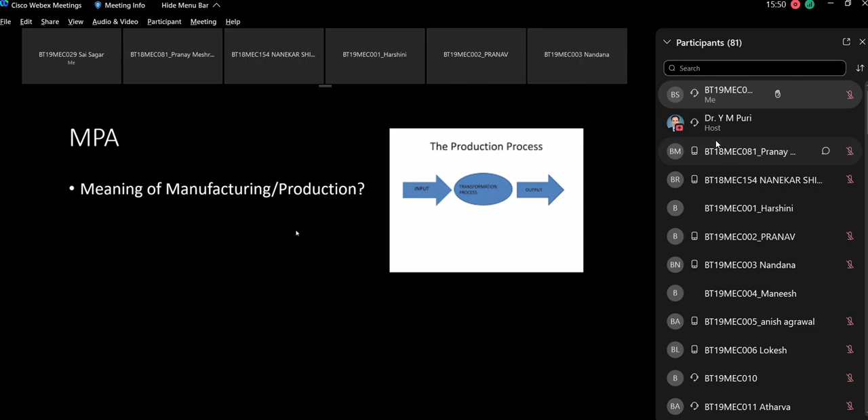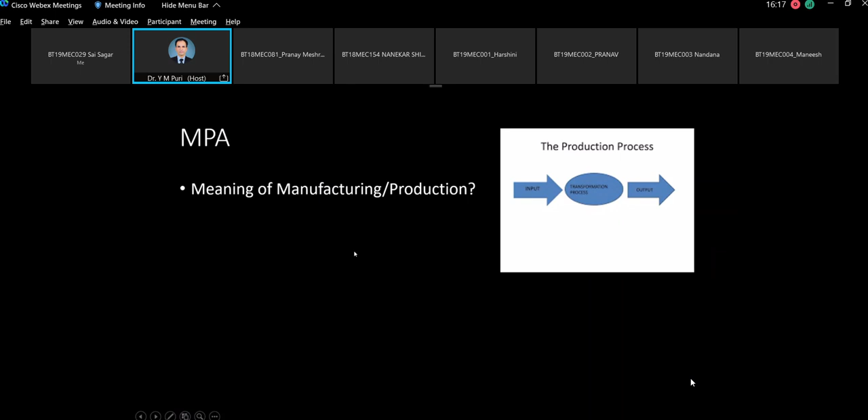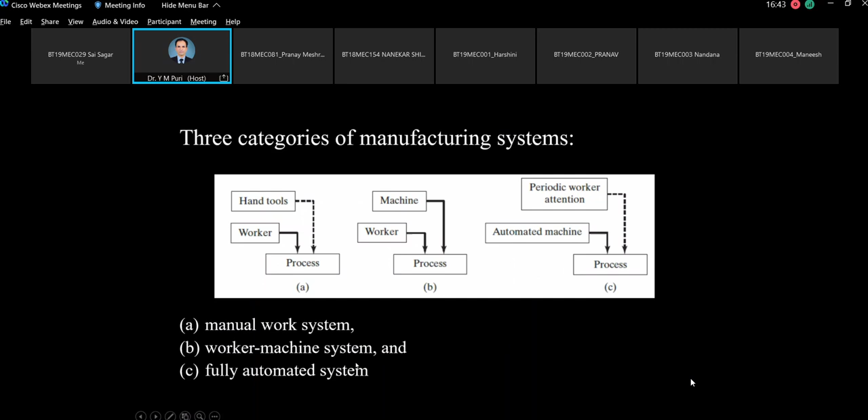So yesterday we have seen discussion regarding what actually manufacturing and production is, and then what are the different supporting activities and facilities of the production system. Then what are the three categories of manufacturing systems, like purely manual work system, then worker-machine system, semi-automatic or partially automatic system, and fully automated system. Then what are the relative strengths and attributes of machines and humans, and what are the business functions or supporting functions for manufacturing plant operations.

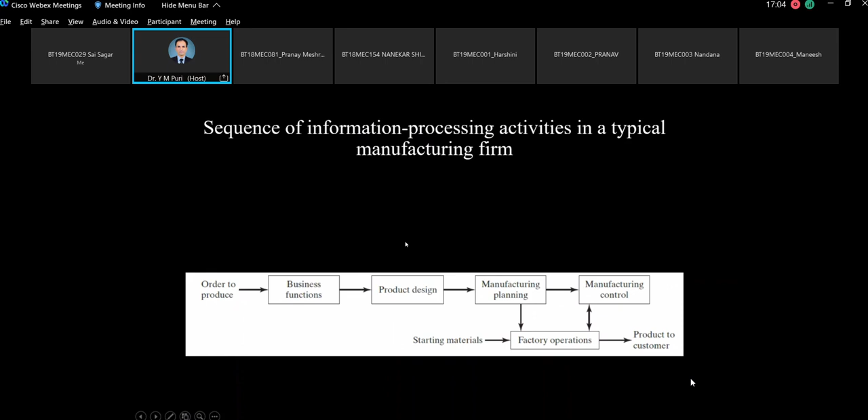So here this part is what we are going to call automation, and this soft part is what is said to be computerization, like product design, manufacturing planning, and manufacturing control systems.

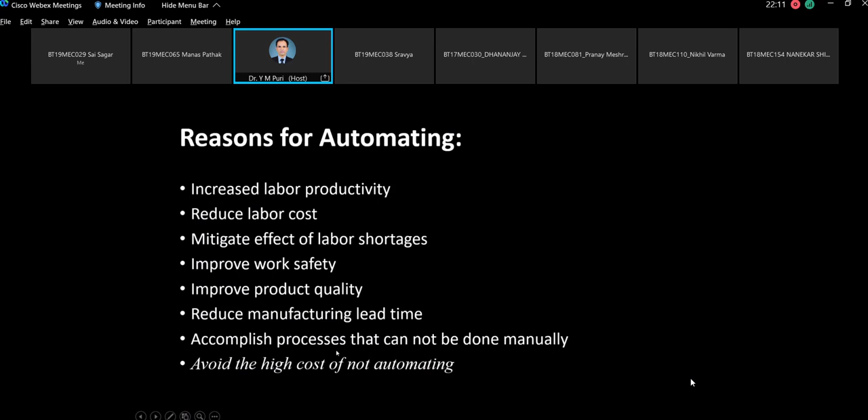So these are the basic reasons, apart from other reasons. Like suppose we are automating, so we have an advantage over the other non-automated industries, and we can gain that advantage in our marketing. So in short, this is the definition of automation given in the book by M.P. Groover.

Automation can be defined as the technology by which a process or procedure is accomplished without human assistance. So I told you that it is not exactly without human involvement - it has to be minimum human intervention or minimum human assistance. It is implemented using a program of instructions combined with a control system that executes the instructions.

So automation is executed or implemented by using controllers, sensors and actuators. So these systems are there, then we will be able to achieve the automation.

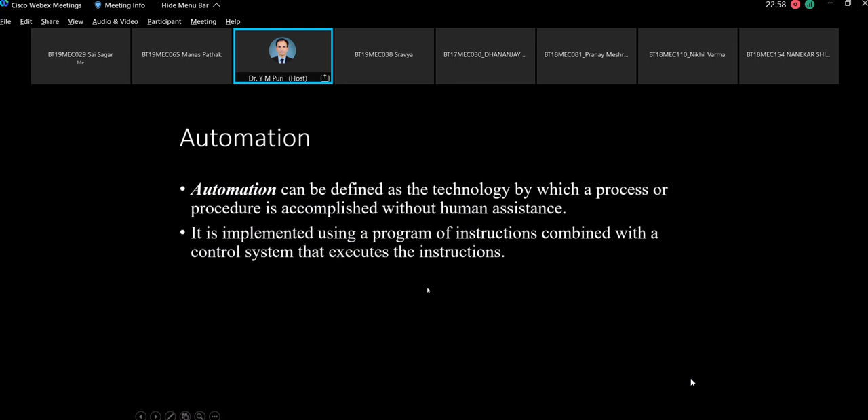So now we will see first of all in which situations we should go for automation and how we can go for automation. So one generalized principle is known as the USA principle.

That is, first of all we need to understand the existing process which we need to automate. Then we should try to simplify the process. After simplification and understanding of the process, if the simplified process is still needed to really automate, then we can go for automation. Otherwise, if it is simplified in such a way that it need not go for automation, then we can reconsider whether to go for automation or not. So that is what is given as the USA principle - Understand, Simplify, and Automate.

But anyway, if we want to go for automation, then these are the strategies we need to follow. First of all, we have to go for specialization of operations - meaning some operations which are specialized, we have to identify those operations, and then design the automation system for those operations.

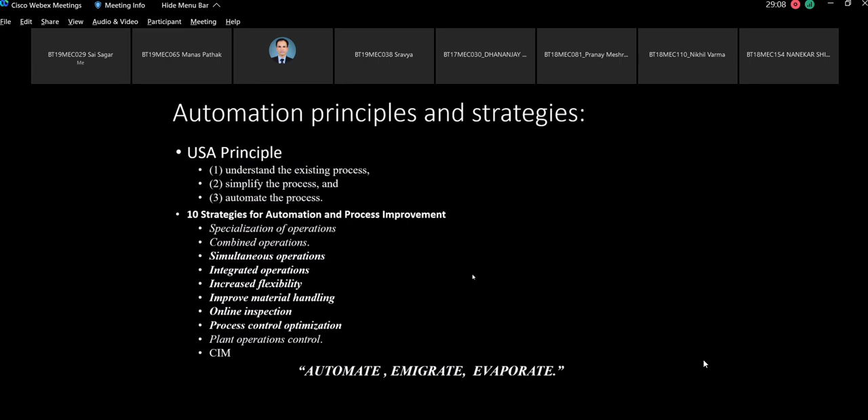We have to automate the process. We should use as much automation as possible, as much as feasible and viable. Before going for any project implementation, we have to see the feasibility of the system, feasibility of the implementation. Then we have to think of viability, financial viability. We have to also think of the social impact, social acceptability. So all these things we need to consider while implementing any change in technology.

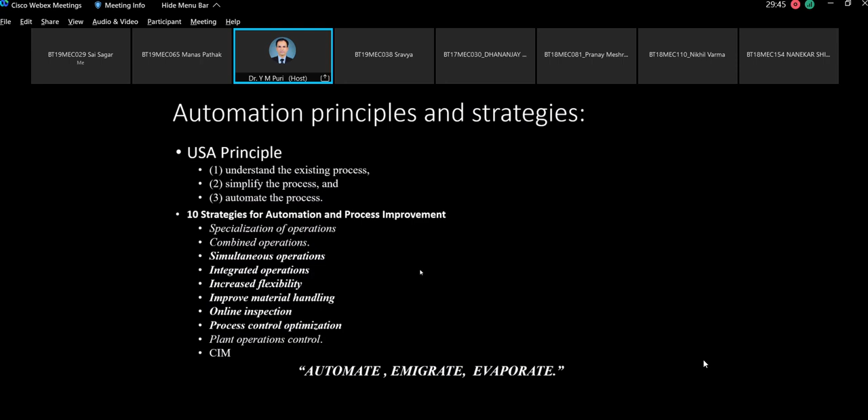So this is what actually is there, but we cannot go all of a sudden, we cannot switch all of a sudden to the automation stage. If we want to switch to automation, suppose we want to introduce any new product, we should not directly go to automation, but first go in a phase-wise manner. In this slide, 3 phases are explained. For example, a typical automation migration strategy is given.

Phase 1: manual production using single station manned cells operating independently. This is used for introduction of a new product. If you want to introduce a new product, instead of investing in automation facilities which will cost much more initially, first of all we should start with manual stations because manual stations are quicker and cheaper with simple machines.

Then if we find that our product is now successful in the market, we can go for single station automated cells. After that, if the product grows and becomes more successful in the market, and we think it is a long-term product that is going to stand in the market with increasing demand, then we can go for the automated integrated production system.

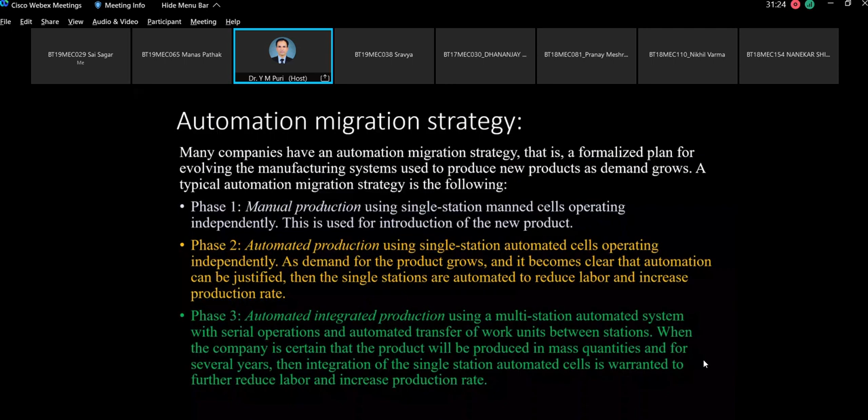Then in the second phase, automated production: production or processing machines can be automated, whereas handling can be manual. Like loading and unloading can be manual, but the processing stations, machines can be automated. Instead of traditional machines like milling machine or lathe machine, we can replace them with CNC machines or automated processing stations, and then loading, unloading and some material transfer can be done manually.

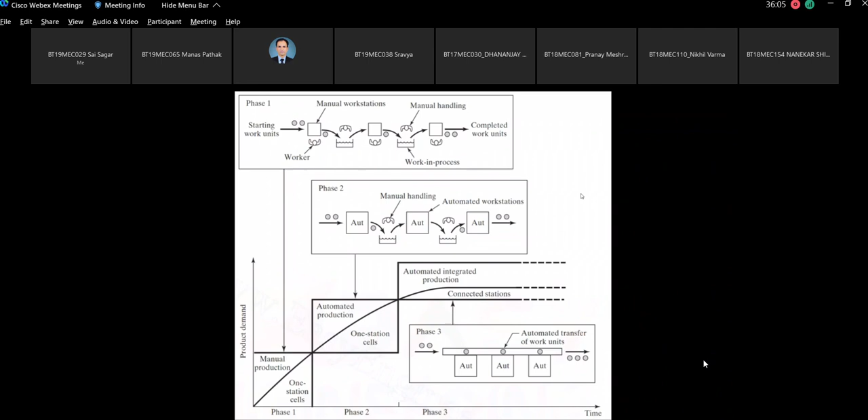Now, what actually manufacturing is: we have seen earlier that starting material or raw material is there, then some manufacturing process happens, and this manufacturing process requires inputs like machinery, tools, power and labor. These four inputs are required. Then we get the output as a finished product, and some scrap or waste will be there. So this is the output or finished product of the manufacturing process, and here the starting material is raw material. This raw material can be a finished product of some other process, and our finished product can be a raw material for the next manufacturing process.

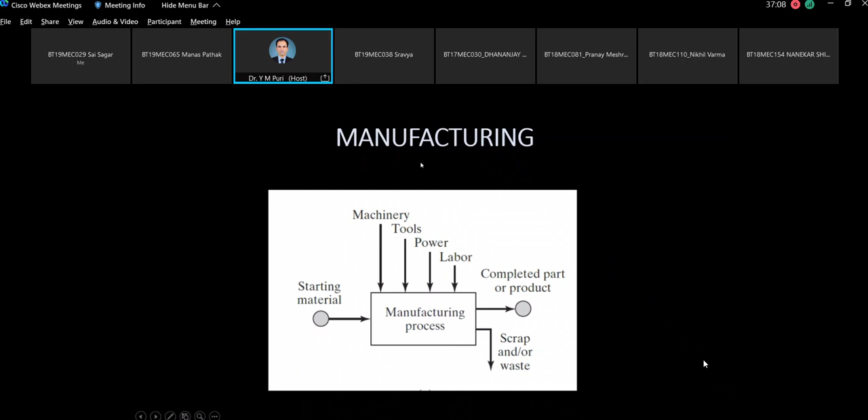But if we think of our product, it will require inputs like machinery, tool, power and labor as a manufacturing process. There are a variety of manufacturing processes. This diagram gives a total picture of manufacturing processes. There are two types: processing operation and assembling or joining operation. In processing operation, there are shaping processes, property enhancing processes, and surface processing. Shaping processes include solidification process, particulate processing, deformation process and material removal process.

So now I want to ask you a question: which processes are there in material removal? Which processes can we name in material removal process in manufacturing? Yes, anybody? Facing, turning, drilling - right, any machining operation like turning, facing, drilling is a material removal process. Punching, grinding is also a material removal process.

Right, exactly, has been given by Saurabh. And AM, who is this AM? Short form? Roll number. Adit. Okay.

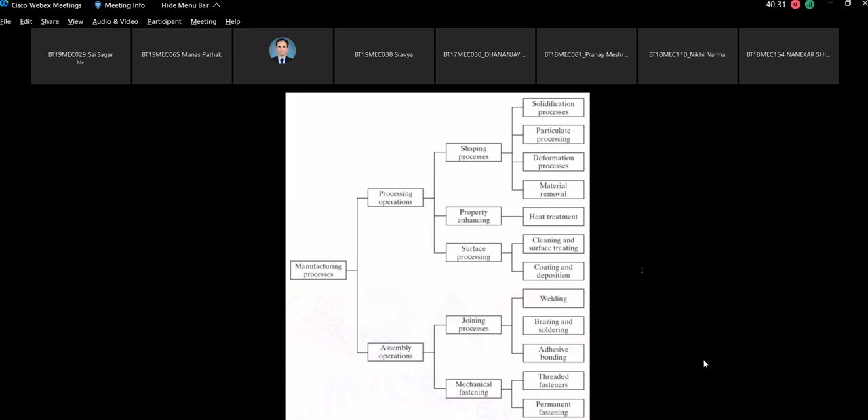Honing, lapping, grinding - you know these. Then joining involves welding, brazing, adhesive bonding. These processes are what we're interested in automating.

If you classify industry by level - primary, secondary and tertiary. Primary industry is agriculture, forestry, fishing, livestock, mining, petroleum. Secondary is aerospace, automotive, textile, wood, rubber, furniture. Tertiary industry includes banking, communication, IT, hotels, service industries, education. We will be primarily focusing on the secondary industry.

Now, industry type. There are process industries and discrete manufacturing industry. These are the very basic things we want to discuss before going ahead.

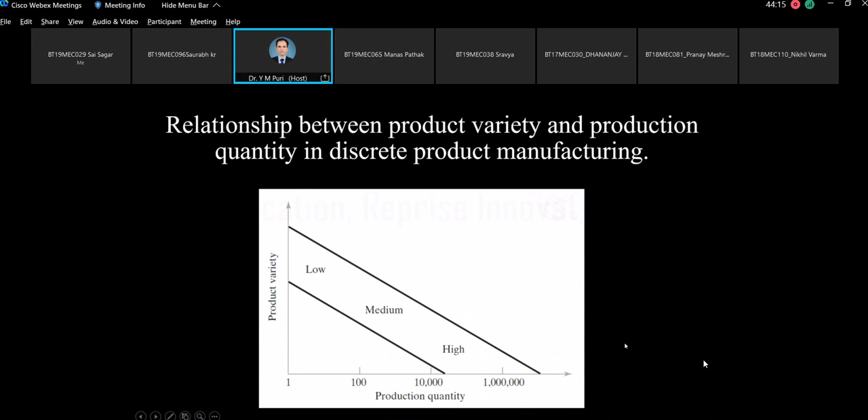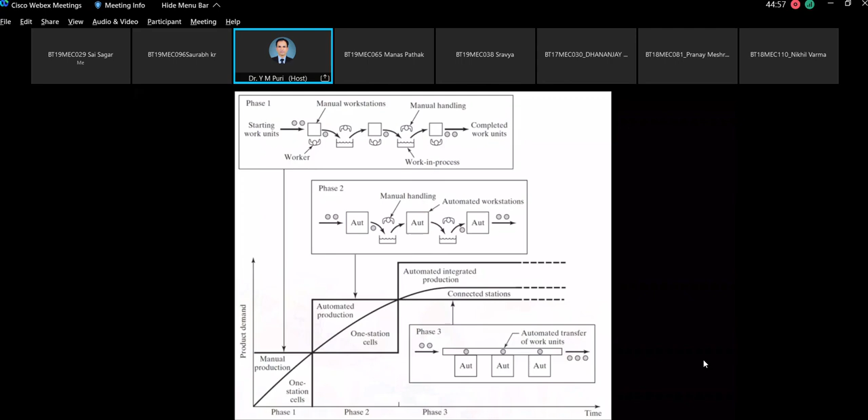This is the same concept explained with a different block diagram, comparing production quantity and product variety again. For high or mass production, more than 1 lakh components, we've already studied that we need product layout where flow lines will be there. Because quantity is more, this type of automation is required where flow line is there - phase 3 automation, mass production lines, fixed or automated.

Then batch production, where medium level of volume is there, requires cellular manufacturing - process layout or cellular layout can be there. Job shop type production may require process layout or fixed position layout. This process layout or cellular layout is more popular nowadays. This is the picture with respect to product quantity and product variety.

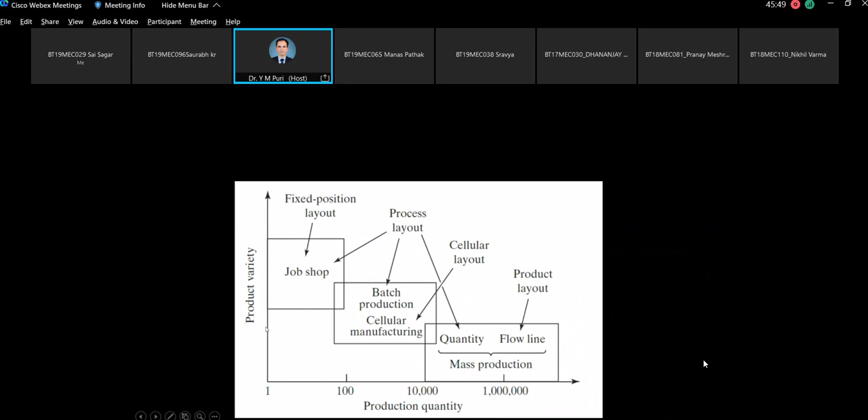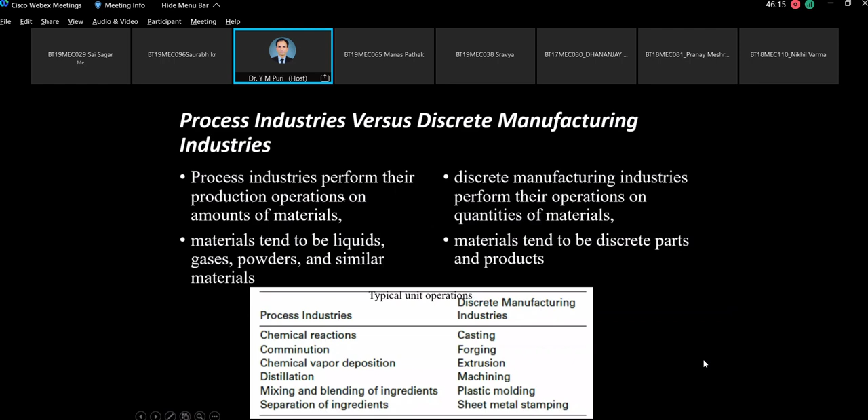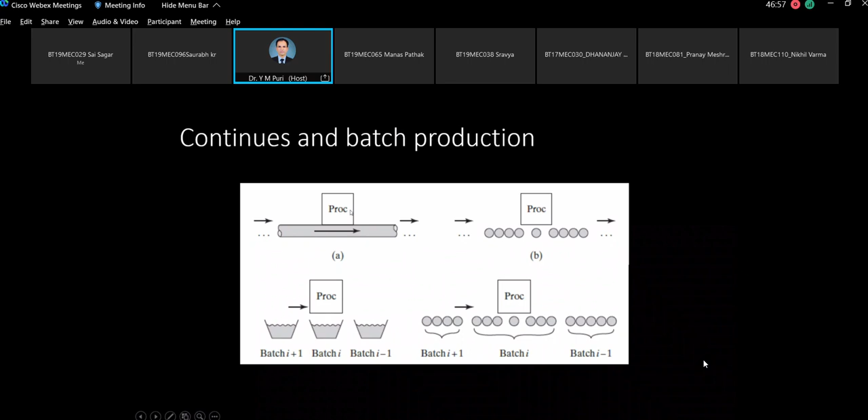Continuous production will require a production line, batch production may require some process layout or cellular layouts. In process industry also, generally a product layout is there.

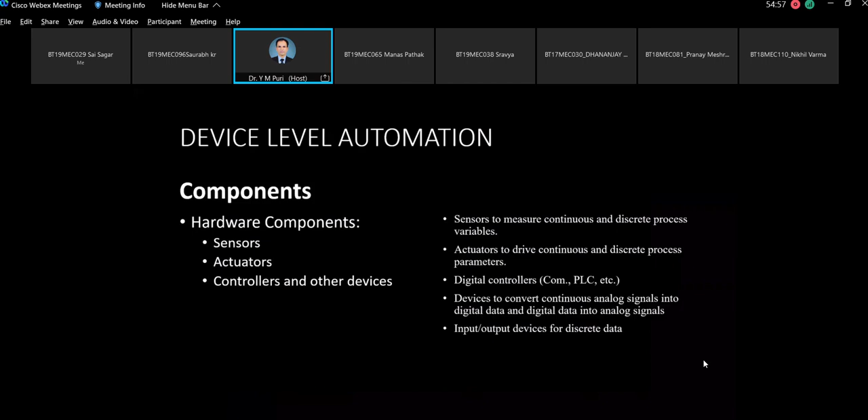So likewise, levels of automation are there. These levels of automation we will be studying one by one, how we can go for automation. First of all, we will be studying device level automation, and then we may go for the next level of automation in the course of this subject.

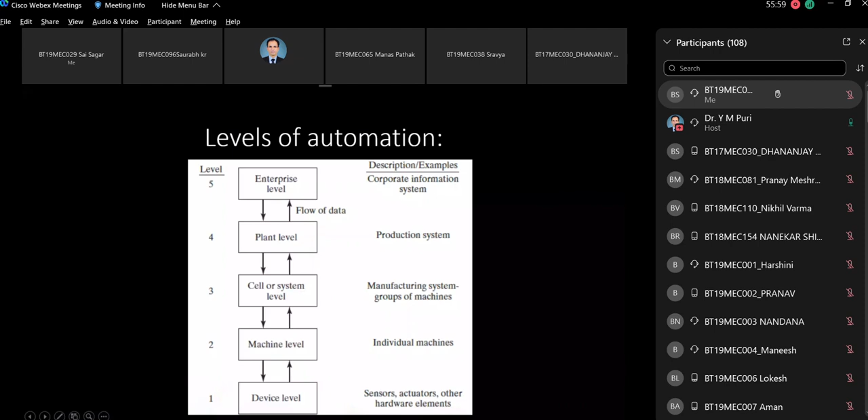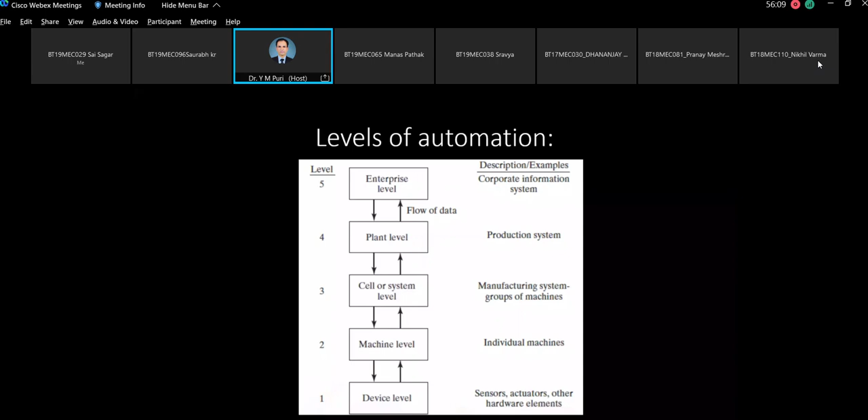So is it clear that at manufacturing industry and process industry, if we start from device level, then some difference is there, but at enterprise level, things become the same.